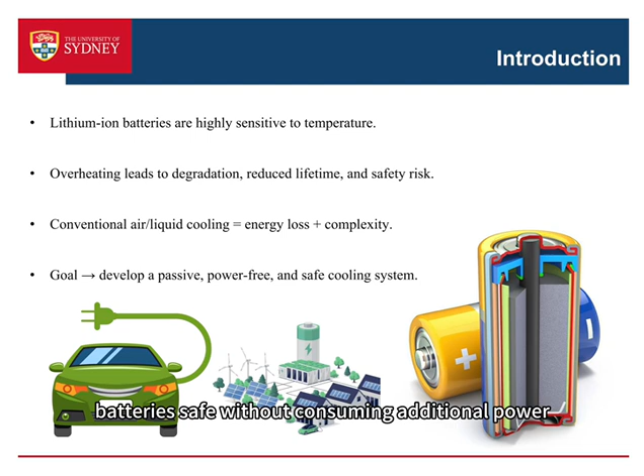So our goal is to design a passive, energy-free, and uniform cooling solution, one that can keep batteries safe without consuming additional power. To address this, we propose using phase change materials as a passive thermal regulation layer. PCM absorbs large amounts of heat when it melts, keeping the cell's temperature within a safe range, typically between 25 and 45 Celsius.

Unlike air or liquid cooling, PCM has no moving parts, needs no external power, and can be easily integrated between battery cells. This means our design can reduce both energy loss and system complexity while improving temperature uniformity and safety.

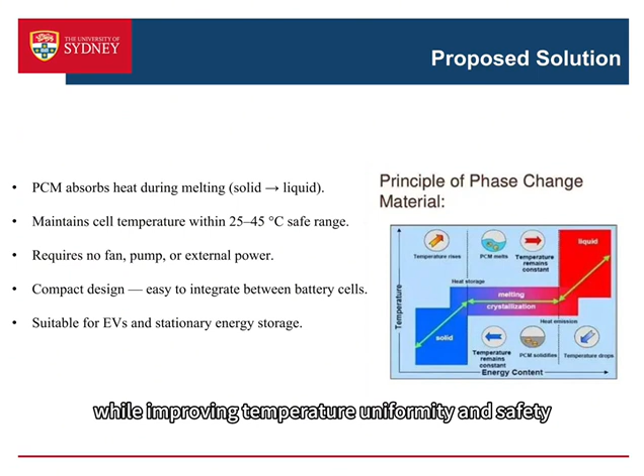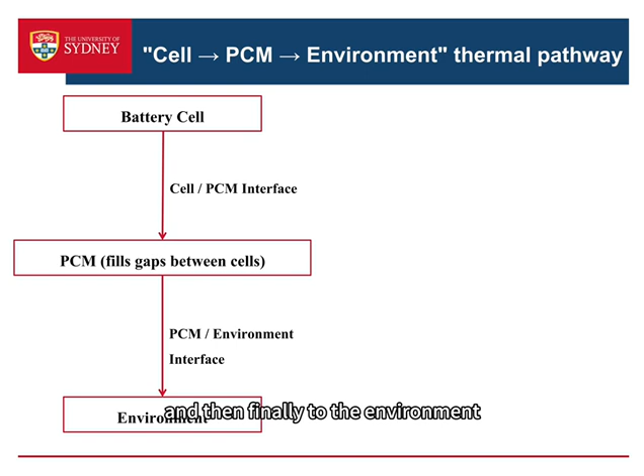This diagram shows the overall heat flow from the battery cells through the PCM layer and finally to the environment. The battery cells are the main heat source in the system. All generated heat first flows outward from here.

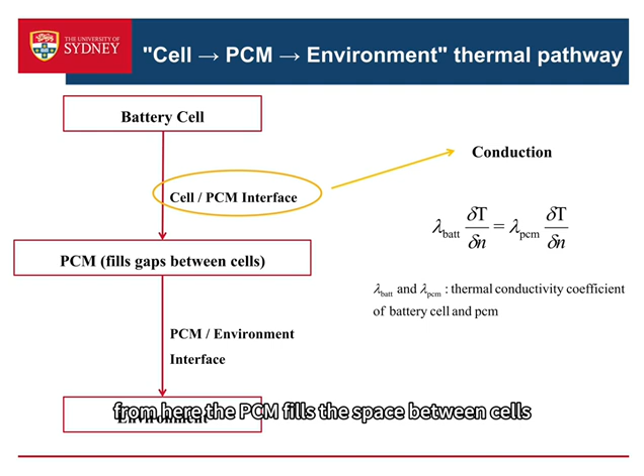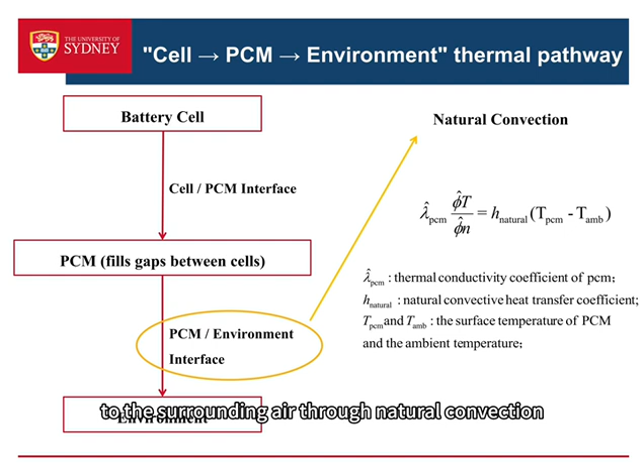The PCM fills the space between cells and absorbs heat during melting, helping to keep the temperature stable. At the outer interface, the PCM releases the absorbed heat to the surrounding air through natural convection. Finally, the heat is dissipated into the environment, completing a passive, power-free cooling pathway.

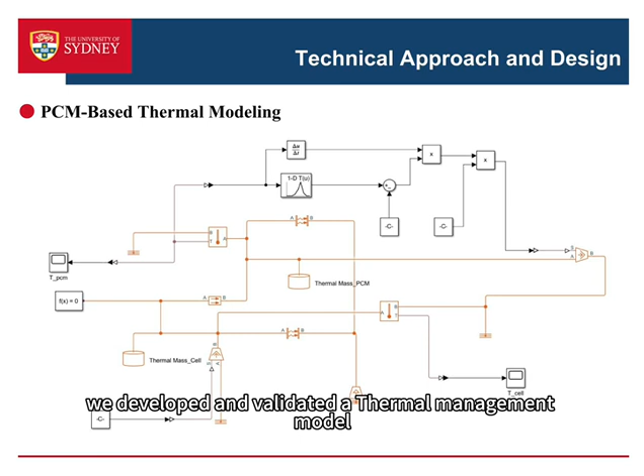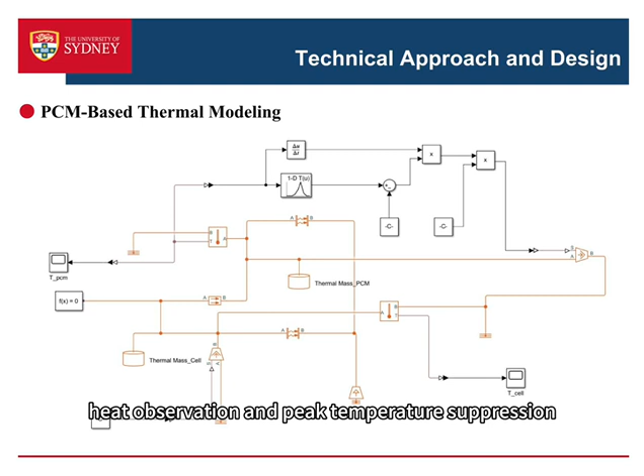First of all, we developed and validated a thermal management model using PCM within MATLAB Simulink. The goal is to analyze how PCM affects temperature rise, heat absorption, and peak temperature suppression compared with a normal battery cell without PCM.

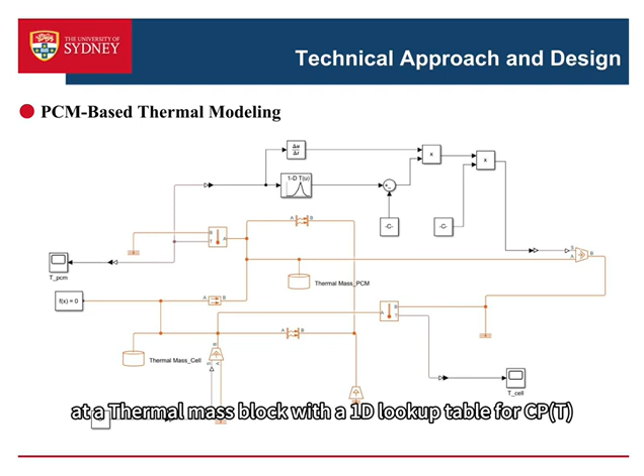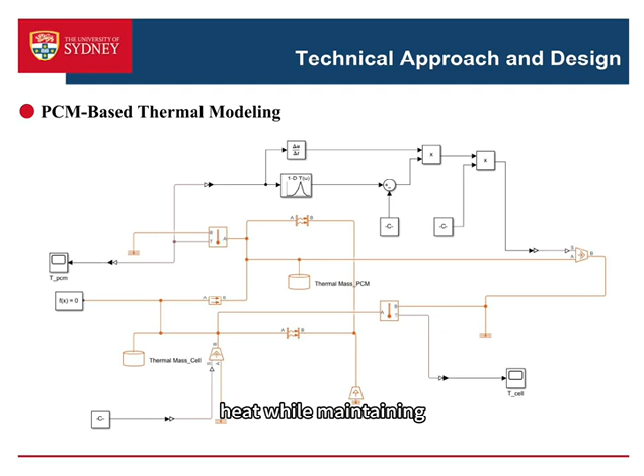The equivalent specific heat method is used, where the PCM's latent heat is represented as a thermal mass block with a 1D lookup table for CP, coupled thermally with the cell and environment. This allows us to capture the phase change process. When PCM melts, it absorbs a large amount of heat while maintaining a nearly constant temperature.

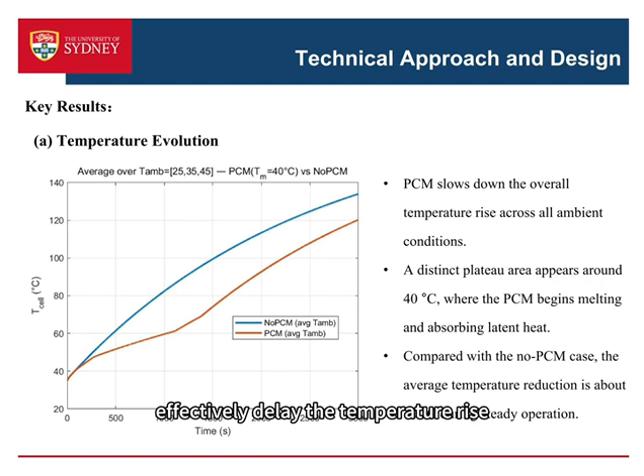For the key results, here we can see the temperature evolution curve averaged over different ambient temperatures. You can see that the PCM case rises much more slowly, and a clear plateau appears around 40 degrees, which is where the PCM begins to melt and absorb heat. Overall, the average temperature is about 10 degrees lower than the no-PCM case under static conditions. This confirms that PCM can effectively delay the temperature rise and smooth the thermal response.

Next, let's look at the heating rate comparison. Before phase change, the heating rate was approximately 0.055 degrees per second, but once we reach the melting region, PCM drastically reduces the heating rate to nearly 0.005 degrees per second, indicating strong heat absorption. That means the PCM is actively absorbing latent heat and buffering the temperature rise. After the PCM fully melts, the rate goes back to the baseline, which matches physical expectations.

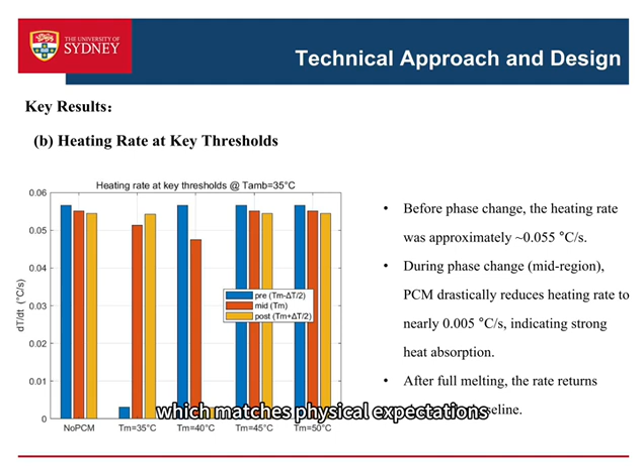Now looking at the peak temperature, without PCM the maximum temperature reaches about 135 degrees, which is quite high. When PCM with a melting point of 40 degrees is used, the peak drops significantly. Among all the cases, PCM with melting temperatures between 40 and 45 degrees performs the best because that range aligns perfectly with the cell's main heating trajectory.

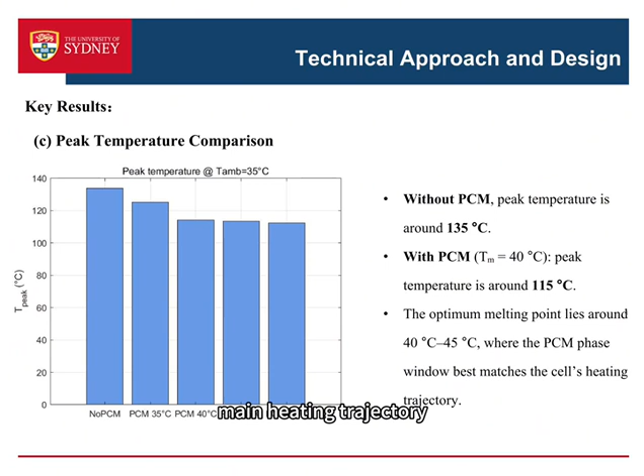Finally, this plot overlays all temperature curves at 35 degree ambient. The dashed black line is the no-PCM case, showing a continuous exponential rise. The PCM curves, especially those with Tm near 40 degrees, show a clear flat plateau between 35 and 50 degrees, which corresponds to the latent heat absorption phase.

After the PCM finishes melting, all curves merge again, showing that the PCM provides a reversible and transient thermal buffering effect. In other words, it absorbs heating when needed but doesn't permanently alter the temperature trend. Overall, PCM offers a simple, passive, and efficient way to improve battery thermal management without any active cooling system.

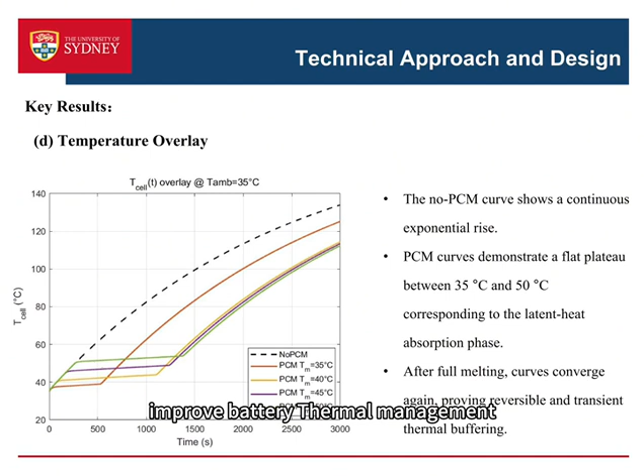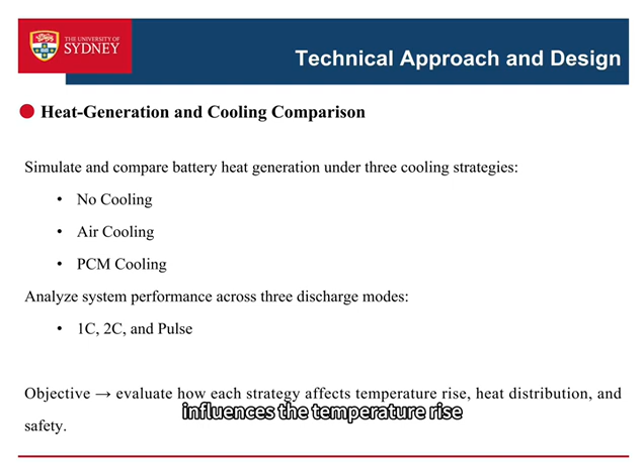The second part focuses on battery heat generation and cooling performance analysis. In this part, we compare three cooling methods: no cooling, air cooling, and PCM cooling, on three discharge conditions: 1C, 2C, and pulse. The goal was to evaluate how each cooling strategy influences the temperature rise, peak temperature, and overall heat exposure of the cell.

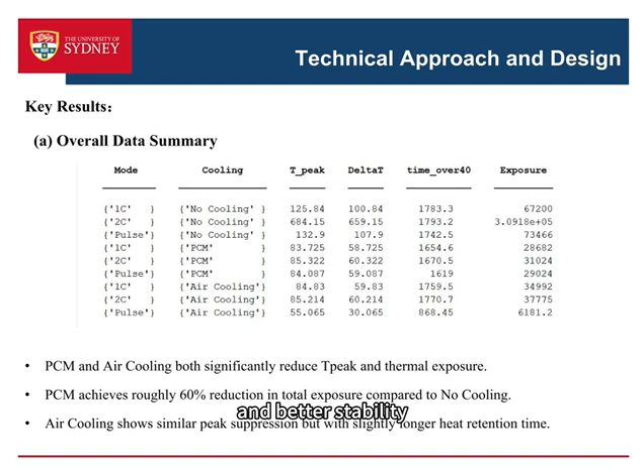Next part is average heating rate comparison. From the picture we can see without cooling, the heating rate during the 2C discharge spikes to 0.35 degrees Celsius per second, which is extremely high. When PCM or air cooling is applied, this drops to about 0.05 degrees Celsius per second. That means both systems effectively limit the rate of heat buildup, but PCM provides smoother thermal buffering without active airflow.

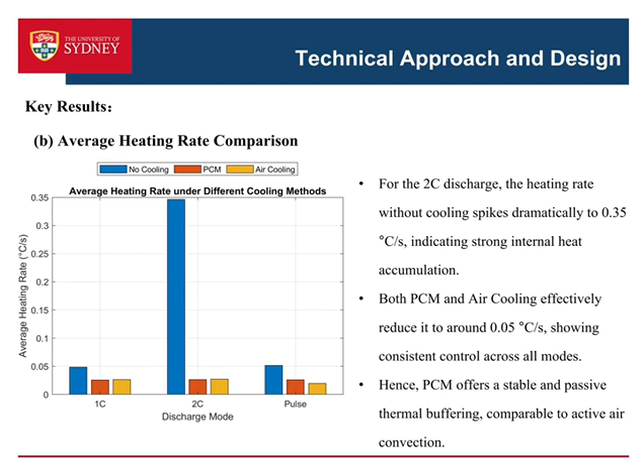Now let's begin Part C, peak temperature comparison. This bar chart shows that under no cooling, the 2C case exceeds 680 degrees, an unsafe condition. By contrast, both PCM and air cooling keep the peak much lower, with PCM being just a little better. So PCM provides comparable protection to active cooling, but without extra energy input.

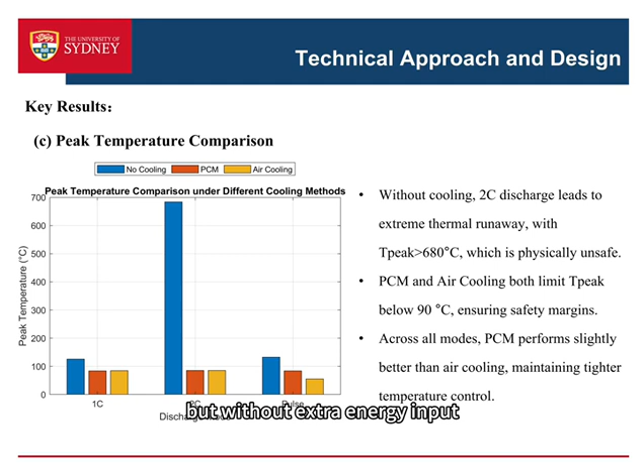Let's look at the transient temperature curves. For 1C discharge, the PCM curve shows a smooth and controlled temperature rise, with a small plateau around 40 degrees, while the PCM starts melting and absorbing heat.

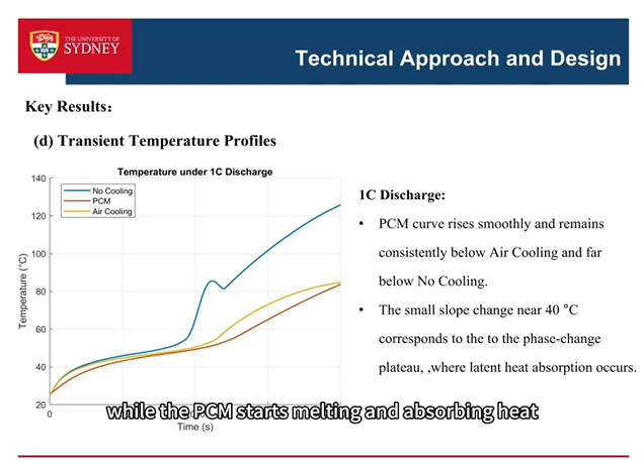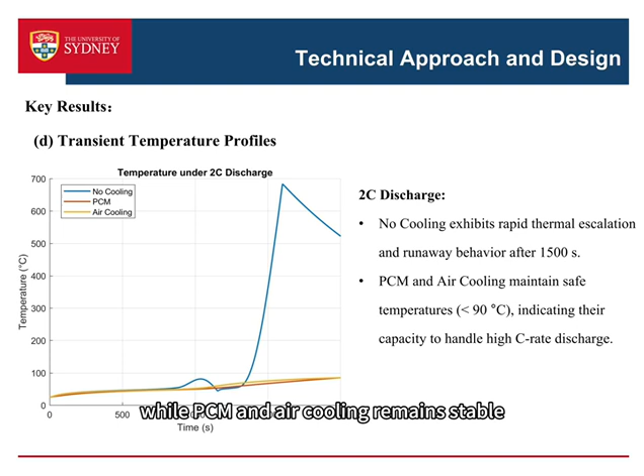In the 2C test, the no-cooling curve rises sharply and runs away after 1,500 seconds, while PCM and air cooling remain stable at much lower temperatures. Under pulse discharge, PCM effectively dampens the rapid temperature oscillations caused by current pulses, maintaining much smoother behavior than air cooling. In short, PCM offers a simple, efficient, and reliable solution for keeping battery temperatures under control.

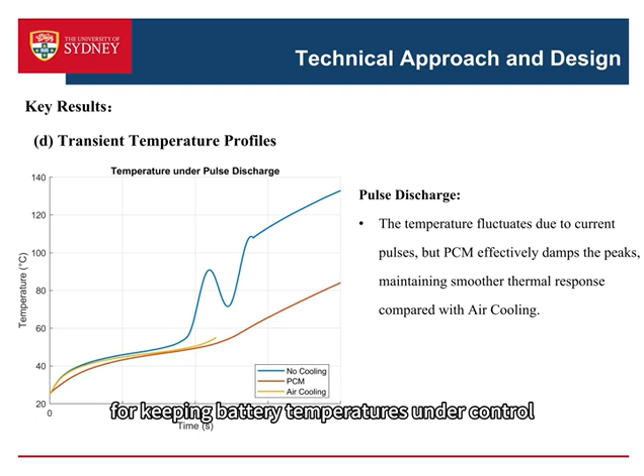From a customer's viewpoint, this means longer battery life and better safety without needing active cooling hardware, lower operating costs since PCM uses no extra energy, and simpler maintenance as there are no moving parts or pumps. For manufacturers, PCM offers a cost-effective and scalable integration path for future battery packs.

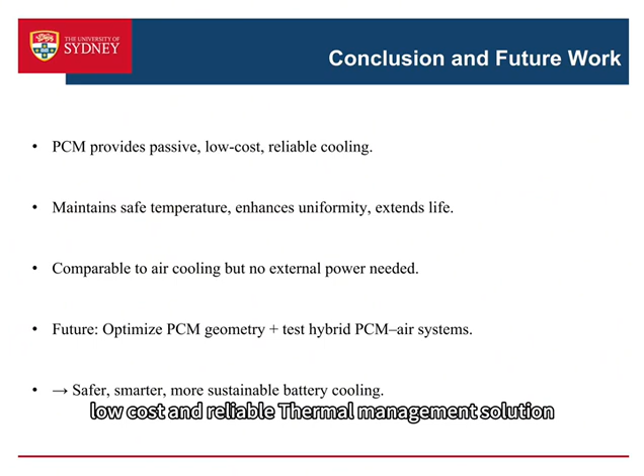To conclude, our PCM system provides a passive, low-cost, and reliable thermal management solution. It keeps the battery temperature safe, improves efficiency, and extends lifespan, all without external power demand. In future work, we can optimize PCM geometry, explore hybrid PCM-air systems, and validate the model with experimental data. In short, PCM cooling makes batteries safer, smarter, and more sustainable.